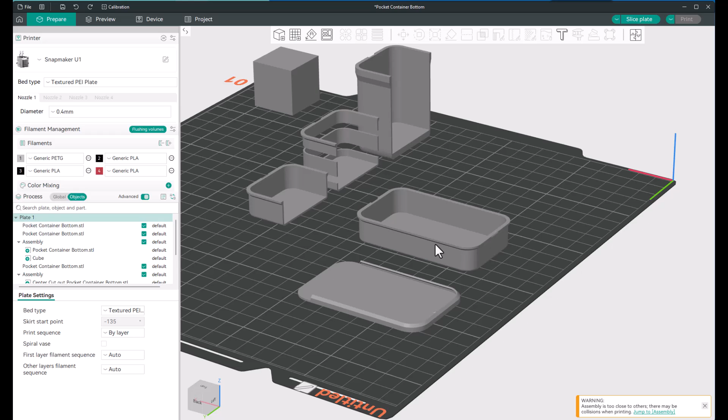Let me grab a lid. Right there, this is what the lid looks like. Let's flip it over. So what happens is the lid has these rails on it. There's no rail on this side of the lid, it's just flat. The rail wraps all the way around. This lip on top of the bottom is what holds it on, and it's got two indentations right here. Then the lid actually has a little nub that holds it in these places. It works really good, it's a good little design.

Let me show you where I got it from. So here's where I got it from, Maker World, and it looks like the designer's name is Arc 3D Printing. He's got... I don't see any pictures here, but I thought on the other one he had pictures, yeah right here. So this is the same thing, but he shows you how to put text on it. I went through and made a video on how to put text on pretty much any 3D model. He's got SD and USB drives, SD cards, magnets, all kinds of stuff. Anyway, that's where I got it, to give him credit for the design. It's a good little design if you want to print some, download it and print some.

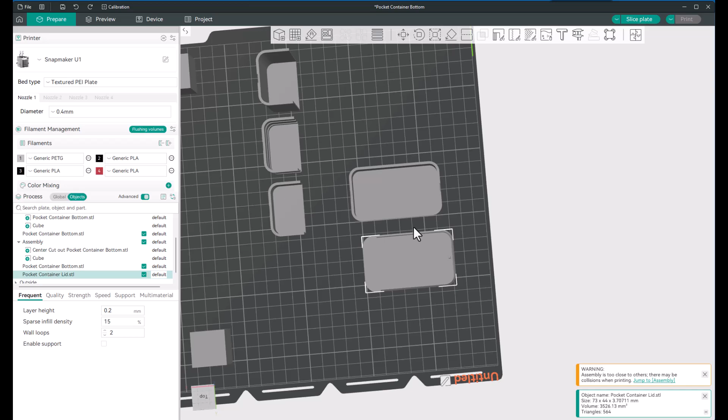So like I said, we have the bottom of the container right here, and we have the lid right here. So the problem is, if we were just to go, say we want to resize this, say we want this thing like 30 or 40 millimeters tall, and we go here...

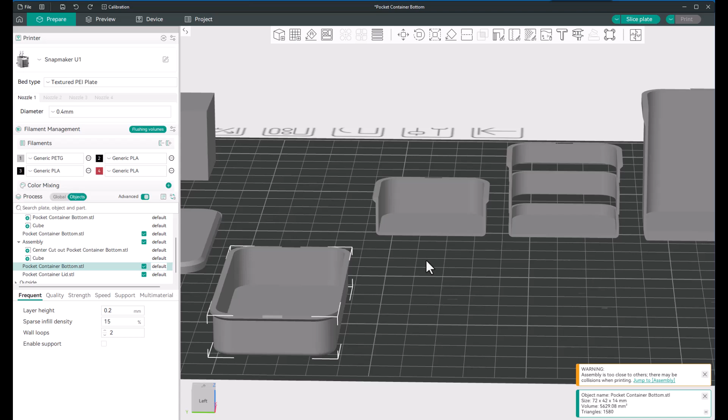These are cutouts that I made just to show everybody what happens when we start scaling these. That's why a lot of times it's not really a good idea to scale things. So here's a cutout of the original. Let me move this guy over right here.

Oh man, I want to make this video fast too.

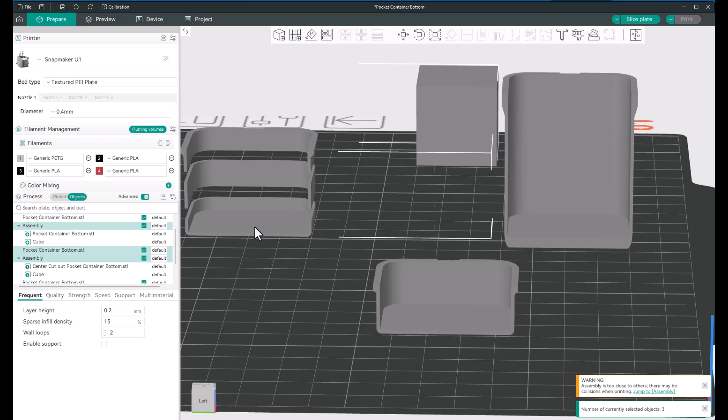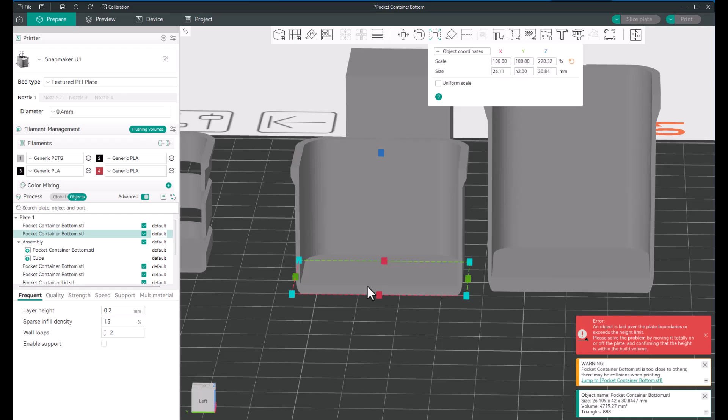All right, so here's a cutout of what it should look like, and then this is what happened to it when I scaled it. You can see when I scaled it, and what I mean by scaling it is I just select the part, go up here, click on scale, and I wanted to scale it higher for the Z, so then I would just start scaling it like this. Well, at the same time I'm scaling this, the groove around the whole part is getting bigger, and the bottom is actually getting bigger toward the floor of the container. So that's not going to work for 3D printing, because you'd be wasting extra hours just printing this thing.

I'm going to hit undo so it goes back down to where it should be. This is just an example of how extruded it got when I did that to it. Okay, so we can't scale these. Some things you can scale and it's no big deal, you don't really care.

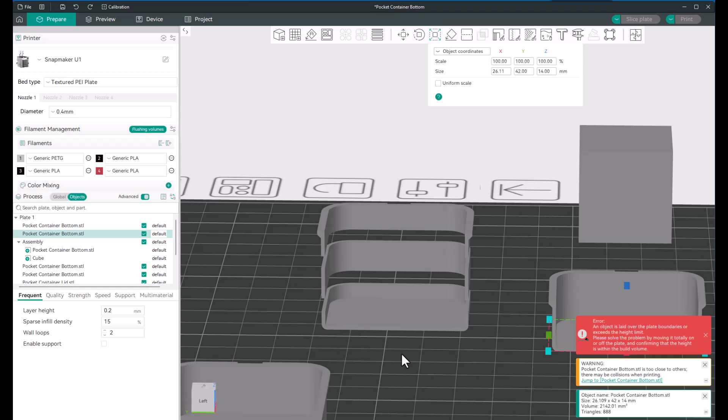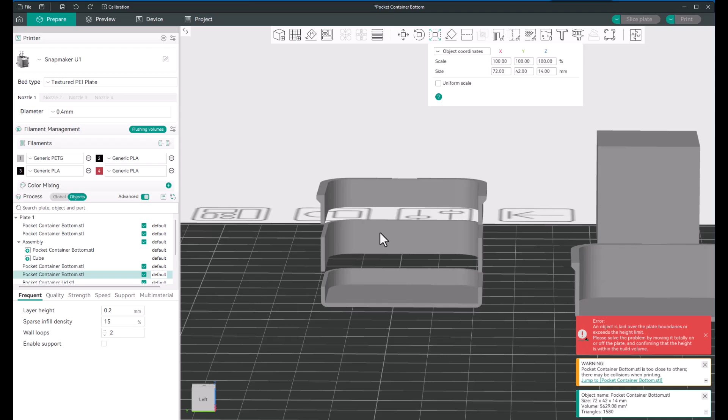So the only way to really be able to do this is to cut it up into three. Let me get this out of the way here, and cut it into three separate pieces. So we have the bottom, we have a center section. We don't want to scale the bottom because the floor got thicker down here, and we don't want to scale the top because this lip around it got bigger. So the only thing we can really scale to make it bigger is this center section that I cut out here.

So if we go and click on this center section, over here in my objects, I actually named the center section right here so I can get to it easier. But so we have the top section, let me grab the top. Let's see, so it must be this one, right? Gosh dang it, which one is the top?

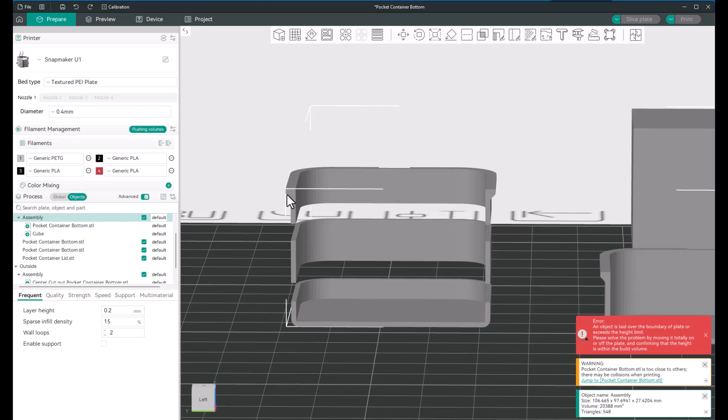Well, what assembly would be? That's the center one, that's the lid. This is another section because it's not highlighting that one. Okay, there's the top right there.

To change the name in the object menu, I can just hold my left mouse button and it'll finally let you do that. Let me put top... top section. Okay, so that's our top section right there.

And what we'd want to do is we're only going to be able to scale this center section. See how there's nothing that's going to change when we scale it? So all I would do is click on that center section.

I would go up here to scale, and then however tall I wanted it, I've already moved my top to that height. And then really what you have to do is go to your move tool.

And now I'm in the move tool. I still have the center highlighted, and I'm going to bring that down until it touches this bottom part here. So when I bring that down, that's good right there, okay?

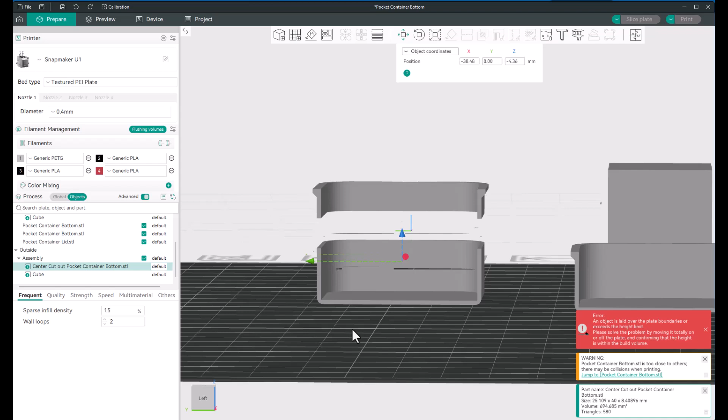Then I'm going to go ahead and go to scale, because now I need to scale this part. And if I hold control and then my blue, this is my Z, and I can pull up from the top only.

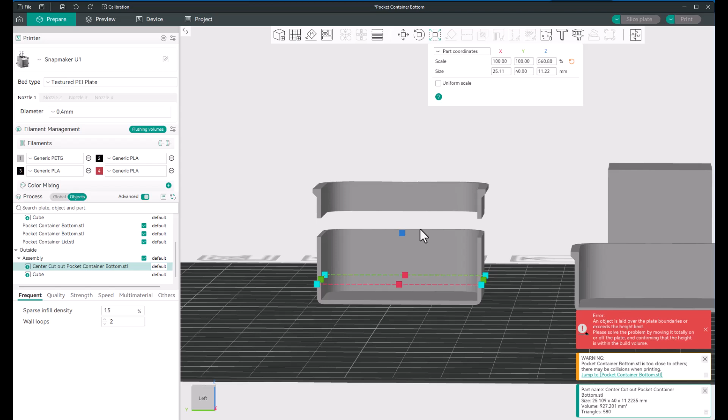If I don't hold control, it's going to scale the whole part on the bottom, which isn't really going to hurt anything in this situation, but that way you can just scale it differently. So I'm holding control and I'm only moving the top, okay?

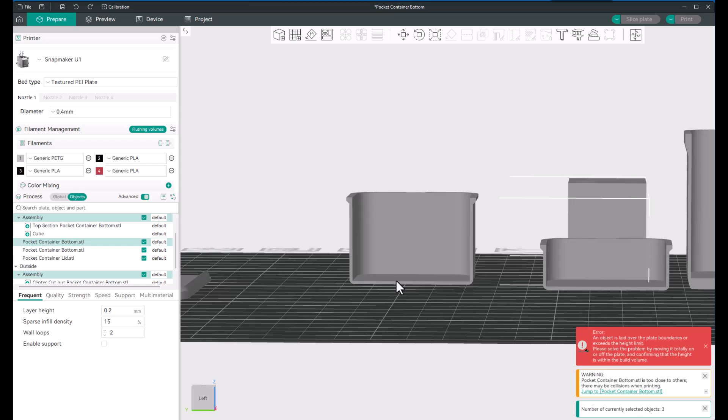So now what I would do with this part, if I was done with it, I would hold my left mouse button and shift, select it, right click, and click on assemble. Now I'm not worried about doing that right now because I'm going to show you how I got to this place right here.

Okay, so here's the bottom of a container. I'm going to take this lid and move it over here out of the way. So here's a bottom container. And let's see what orientation we're looking at. Okay, I'm going to move it back a little bit. So we're looking front to back at this container right here.

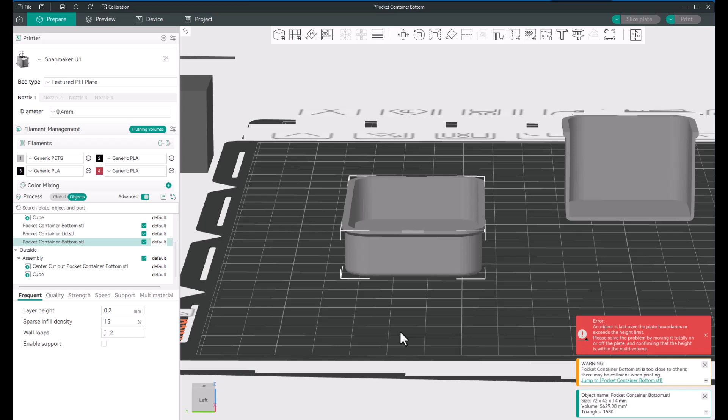So what I want to do is cut this into 3 sections, just like I did in that example. So what I like to do is click on left so everything's looking pretty straight. Then I'm going to go cut it. Now see where the pink is going to be one part and the green is going to be another part.

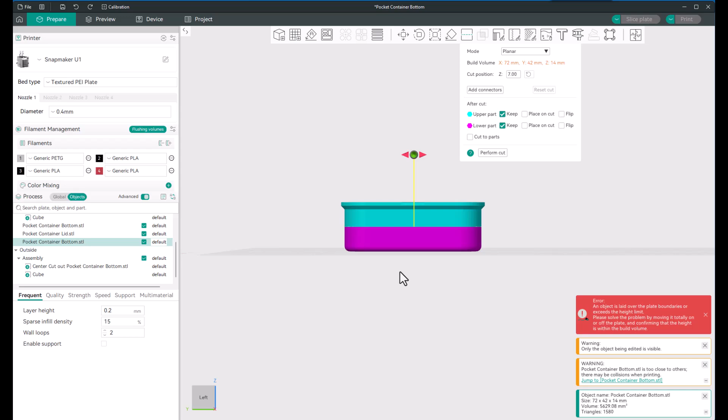Now, if you ever want to change this axis of how you're going to be cutting this, let me go left side. So okay, this would be cutting right now. It's going to cut the green as one part and then the pink as the other part. Now say I wanted to cut the other direction.

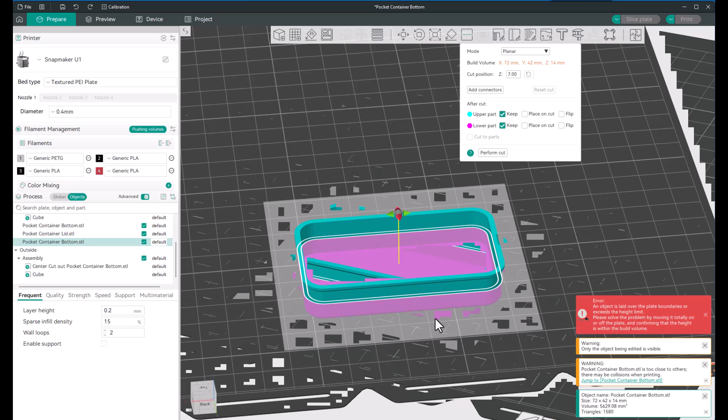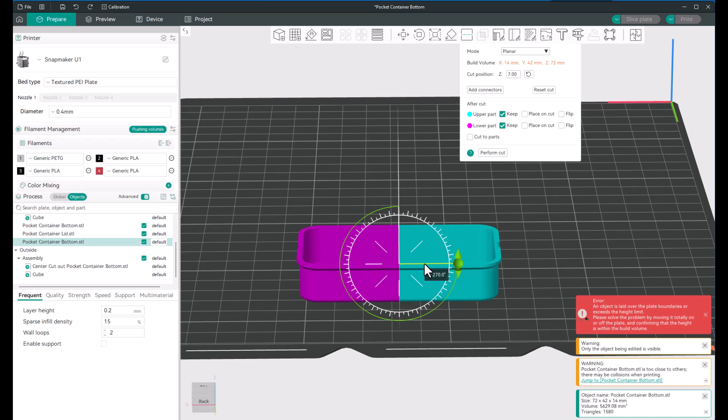So you can see the 2 halves right here. Say I wanted to cut in this direction right here. I could pull this all the way around, hold it to the center mark here, and if you're moving this around, holding it on that center mark, it stops every 45 degrees, and the outside one would stop every 5 degrees.

So now I could cut it this way vertically. Now I don't want to do that, I want to cut it the other direction. So I'm just going to put this back the way we had it. And if I move my mouse down, I can center here.

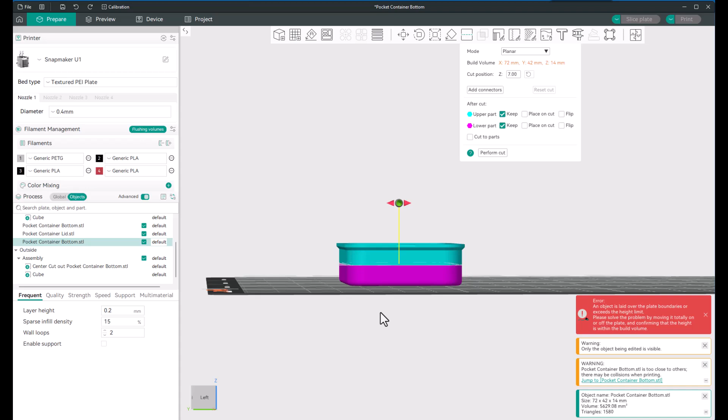Okay, so now I'm just going to go around to the front here, and say, okay, well if I want to move this, this is going to be the Z cut. I can hover over here, let me come down a little bit. When this turns yellow like a tennis ball, then you can pull on that.

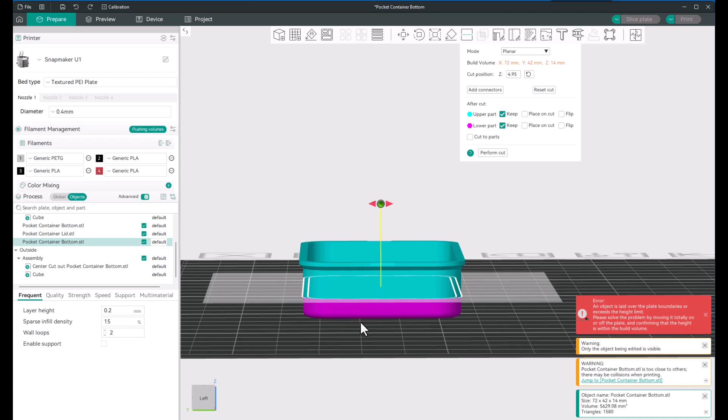So I'm going to pull that down because I want to make a different cut there. Okay, now I'm not getting into the curve, everything is still straight here. So I'm good with that. I'm going to go ahead and cut that right there.

So now I'm going to have two parts there. And what it's going to do is drop to the bed, because there's nothing telling it to hold that up right there. That's what slicer programs do, they drop everything to the build plate. Now I got two parts right here on top of each other, and I really can't tell which one is which. Now they're highlighted over here, so I can see which one is which.

I'm going to click on this right here. Now, the part with the lip on it, I have the bottom piece selected right here, and that's going to stay. This piece right here is the one with the lip on it, and I want to be able to move that up in the air.

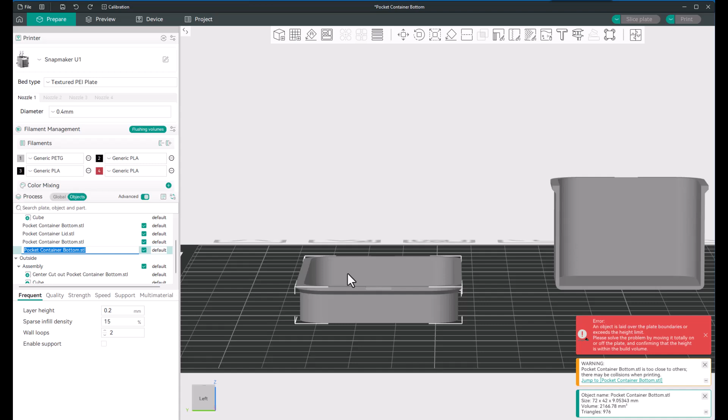So what I'm going to do is click on the build plate over here. This computer is running kind of slow, but I'm going to right click on an empty space, go add primitive, and add a cube. That cube is going to come out in the center of the build plate. Let me zoom out, come on computer. All right, so here's this cube that I just made, a primitive cube, okay?

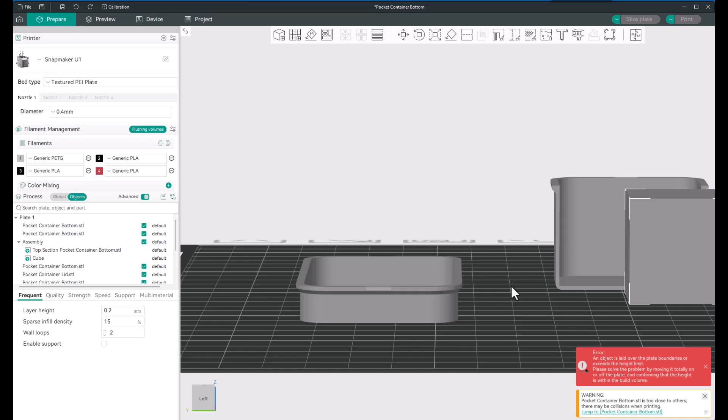I'm going to put it back here for now, and the reason is I need that cube to help me elevate this part that I have right here, okay?

So let's see if I can choose the right part. Okay, so that's the part I want, because I can tell this white is engulfing the part up here. If I were to click on that part, that's the bottom part that I just separated. So I'm going to click on this part right here, the top part, and then hold control and click on that cube back there. Now I have the cube and the top part highlighted, and I'm going to right click and assemble those. Okay, now the program thinks this cube is staying on the build plate.

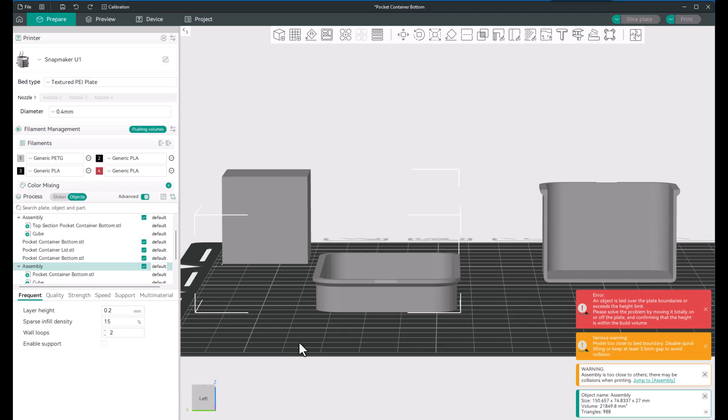So now I can go over and highlight this part right here. Let's see, I'm going to go to move. Let's see if it moves yet. Nope, it's moving the cube too. All right, so I'm going to hit undo. Got that back on the build plate.

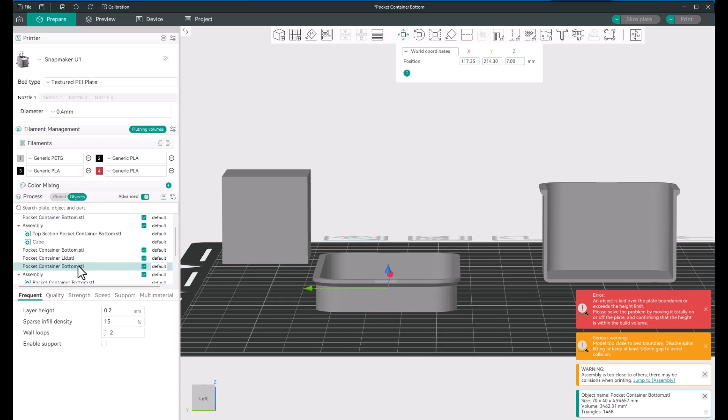I'm going to try to figure out which part it is, and I should have marked this, but I didn't. So I think this is it right here. And that's not it, that's the bottom one. See how the bottom one snapped back down to the build plate? That's because I don't have it assembled with another part on the build plate. So let's see if that's it right there. I think that is it right here. Okay, so there's the top.

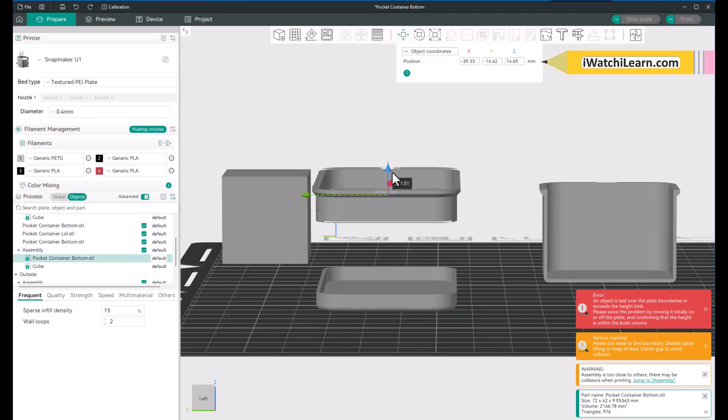This cube is allowing me to move this up. All I did is go to the move tool. Now what I would do is just move this to the height that I want it, and I don't really know what that is. This is not right up here. It's not really telling me that it's 14.69 millimeters.

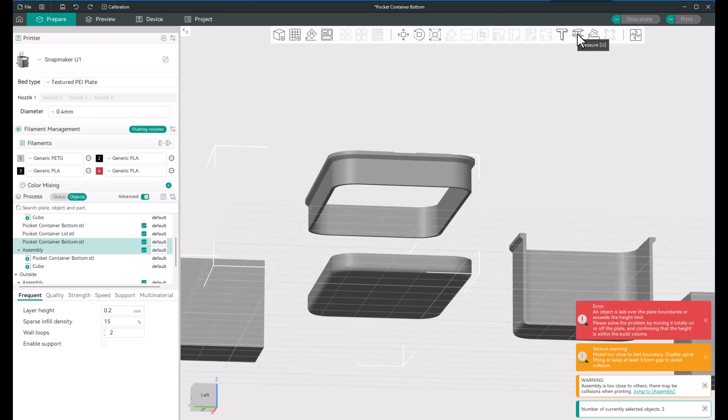But if I really wanted to check, I could go here to the measure tool. Now one thing you have to do is have the parts highlighted to measure them. So I'd have to hold control in, and now I should have both those parts highlighted. I could put my first measurement right there on this green - it tells you up here the green - and then select another plane. My other plane I'm going to select is the top of this. Okay, so that tells me right now that's at 33.410 millimeters. Now I think you can pull this?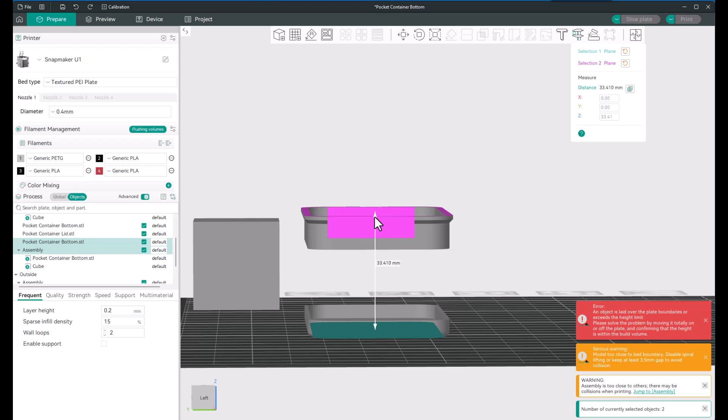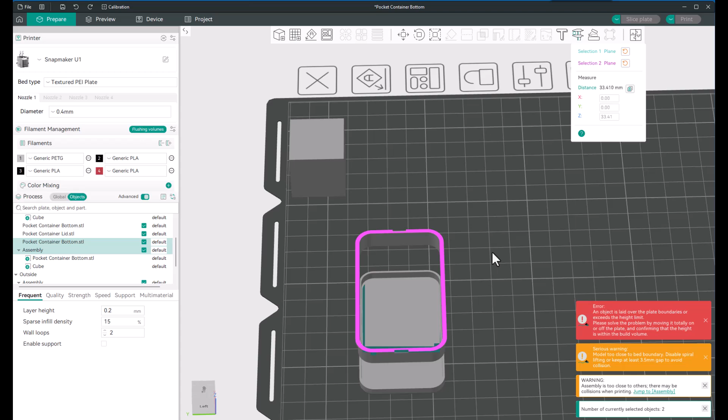No, I guess not, huh. I thought you could pull that there. Yeah, it's still wanting to measure, but all that does is tell you the measurement difference. So if I did want to reset that, I could just go here, hit clear on the right side and reset it here. And so that's 33.410. Now if that's the actual height I wanted, then I'd be good to go. If that's not the actual height I wanted, then I would just get out of my measurement tool.

I would highlight that section, which would be that assembly. When you click on it, the assembly over here on the left side is going to highlight it over here. So this is the assembly that I'm working with. In that assembly, I have that top part and that cube.

If I click on this, it's going to highlight that top part, and then I could hit move, and I could remember what the measurement was, and then just move it the amount I wanted. Say you were going up to 40 millimeters. Now this isn't going to tell you the right measurement here. So say I say, okay, that's good, I'll take that right there where it is.

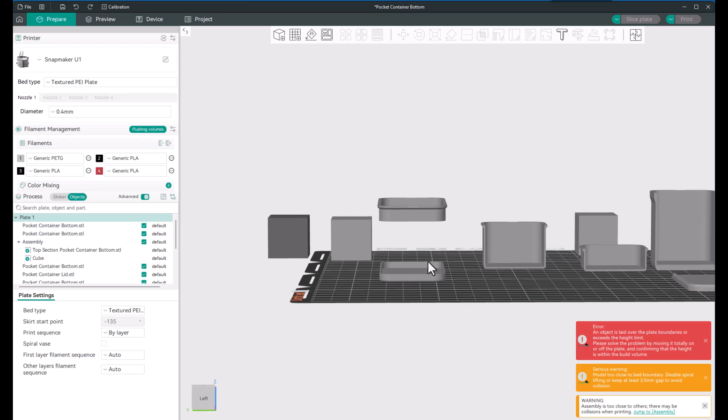So now to actually size this again, I really do need to take another cut out of this, because it's not going to let me size it right if I wanted to. So I'm going to go grab, let's see here. I'm going to select this so I know what assembly it is. So it's going to be that top piece right here. That's the piece I want to cut.

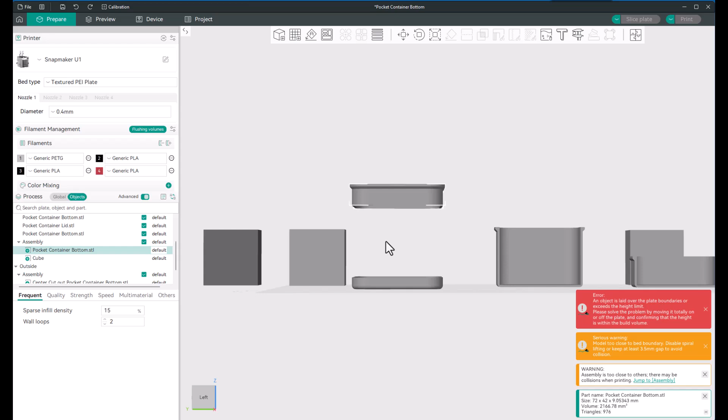And it's not going to let me cut it because I have this other—well, how do I explain that—I have the cube. It's not going to let me cut an assembly. I just have to cut one object at a time. So I'm going to go down here. See how the pocket container bottom that I have selected? It's not an assembly, it's on its own.

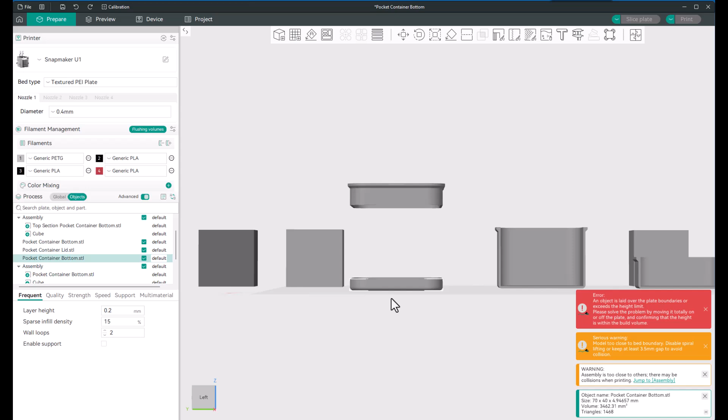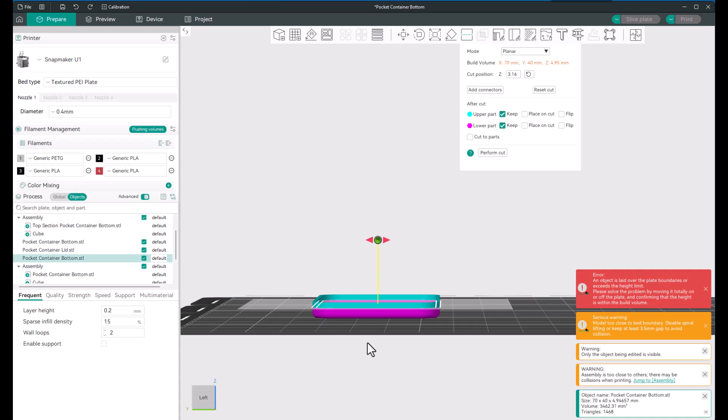So I'm going to go ahead and cut that, because I can cut quite a bit of it here before it gets into the bottom, which is fine. So I'm just going to go here and cut that. And I need to get that tennis ball to turn yellow right there. Then I can move it, and it's kind of hard for you to see, but right now that's my cut I'm making. The green and the pink is what's actually going to be cutting.

Okay, so yeah, I'm good there. I'm not cutting into the floor. Kind of looked like it for a bit, I was cutting into the floor there, but I think it's just the way the colors turn up when you're tilting it. So I'm going to go ahead and do my cut. Now I've got two pieces laying on themselves.

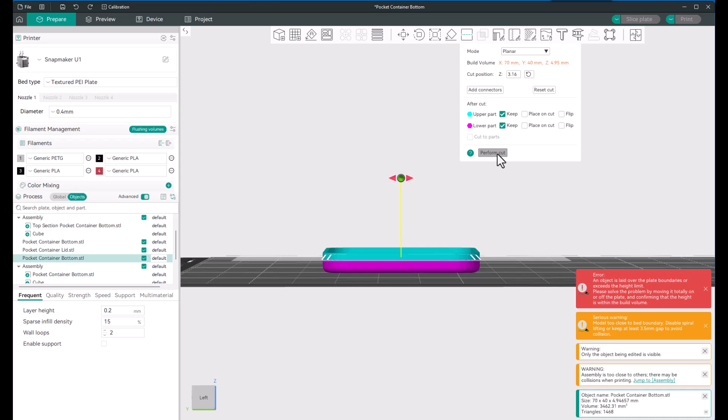So now I need to go over here and figure out—it's telling me you got A and B. So there's my A one right there. See how it's so much skinnier than the B? The B is the full height one. So here's what I need to do again: I need to right click anywhere on the bed, go add primitive, and add another cube.

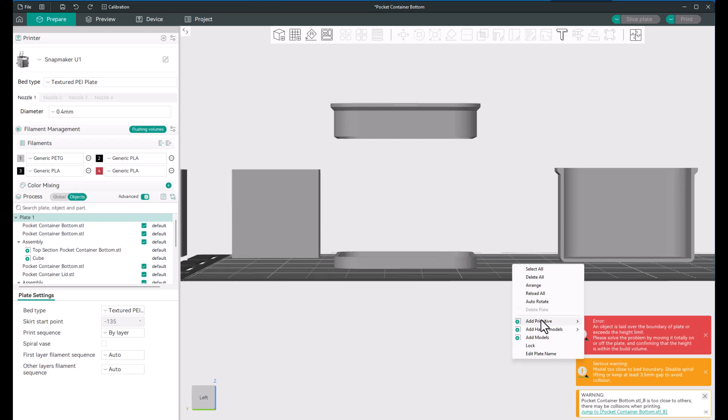I'm going to grab that cube. Computer is—what are we doing, computer? Okay, so this is the new cube that I just now created.

So, and you can size these however you want to. You can make them as small as you want, it just has to be a part. It doesn't matter how big it is or anything. But I'm just going to set it over here for now.

Okay, so what I'm going to do is grab that short section of this right here, and you'll see what I'm talking about. Then I want to go here, hold Control, and either click on my cube here or click on my cube over here. I'm just going to do it right there because it's easier for me to see. See how the cube is highlighted now, and this part is highlighted.

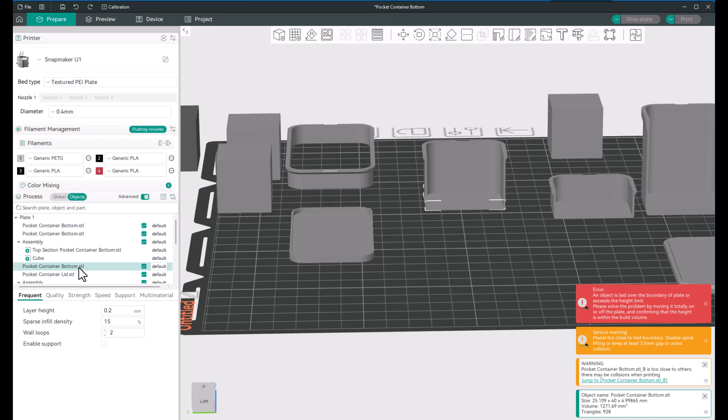Now what I want to do is right click and hit Assemble. Now when I go over here and click on this part—let me get on that part right there. So it would be this part right here. Let's see—nope, it's not that part.

It's not that part. Sometimes you do need to take the time and label these—it does make them easier to figure out what's what. Okay, there it is—see the lower one of those two parts.

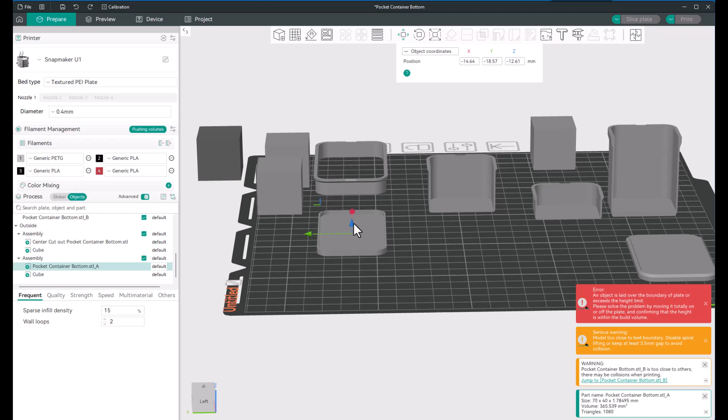So now if I click on move, now I can move that cutout up. And I'm going to hit Control Z, and I'm going to try to hold that straight because you can get off, and I don't want to get off.

Okay, now that's—that's actually the wrong part that I'm trying to move here too. Okay, let's see something here. Either that or I forgot to—no, I made it an assembly. Okay, so there's the cube. Did I assemble the wrong one? No, that's it right there. Okay, I just grabbed the wrong one—I just had the wrong one selected.

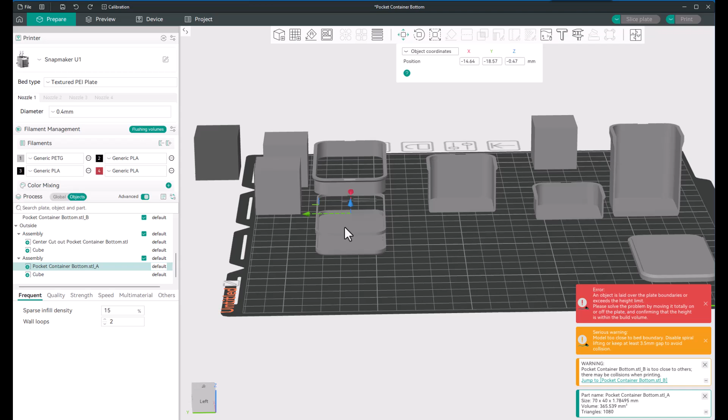Okay, so now I have this thin layer here, and that's the part that I'm actually going to scale, because it's not going to affect the bottom, and it's not going to affect the top with this lip in it here.

Okay, so now what I want to do is take my scale tool. I'm just going to go over here and click on scale, and then as I raise the Z right here, I'm going to hold it with my left mouse button. As I raise that, it's also going down, so I'm going to get quite a ways, because it's not going to connect on the top and the bottom at the same time.

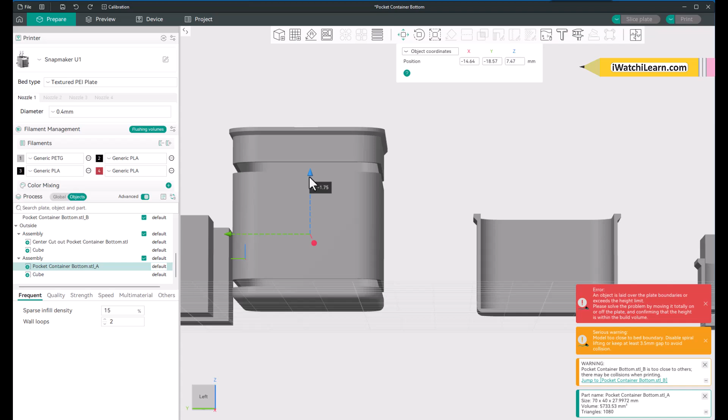So then what I'm going to do is go to move, and I'm going to bring that down, bringing it down into that other part. And when I bring that down into the other part, right there, now I can go back to scale, click on scale up here.

And now I'm going to hold control in and grab this Z blue square here, because I don't want it scaling on the bottom. I don't want it going down past the build plate. So I'm going to hold control in, and then I'm going to move that up right there.

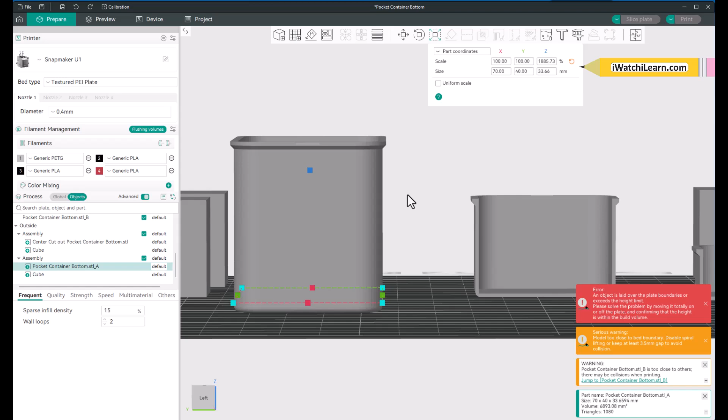At that point, what I could do is reassemble these, or I think it would actually just be fine right now. So depending on what I want to do, let's see something here. If I hold shift in, put a line around them, let's see if it'll let me assemble it. It will let me assemble it, so I'm going to do that.

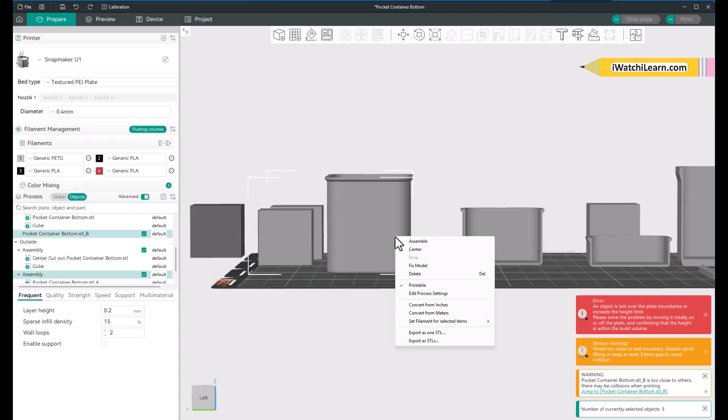And then what I'm also going to do is start getting rid of all these squares, because now I'm really done with them. I don't need them anymore. So when I try to select these squares like this, it doesn't want to let me select them, because they are in assemblies.

Okay, so there's different ways of doing it. What I'm going to do is try to select it over here, and it'll let me select it over here in the object, where it won't let me select it over here, which is kind of weird, but that's okay. So I'm just going to select that cube, and I'm going to hit delete.

Then I'm going to select that cube and hit delete. And all these other cubes, I don't really need anymore. But on these ones over here, I kind of do still need them, because they might be holding those parts up still. That's what they are used for.

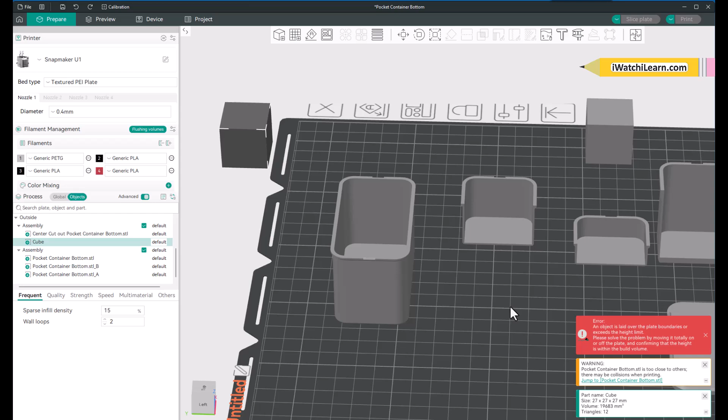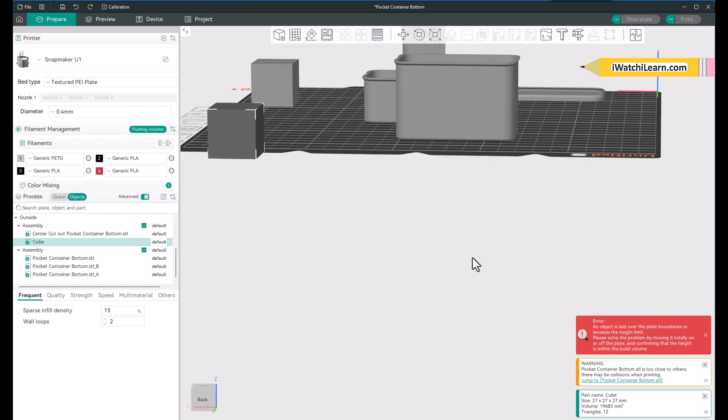But in this situation right here, we have this part ready to go, and we've changed that. We've made it taller by cutting it into 3 sections. And then we could do the same thing on this side if we needed to, or the front side. Either way, we could cut it vertically here, then 3 sections, cut it out, and make it wider, exactly like we just did on the vertical side.

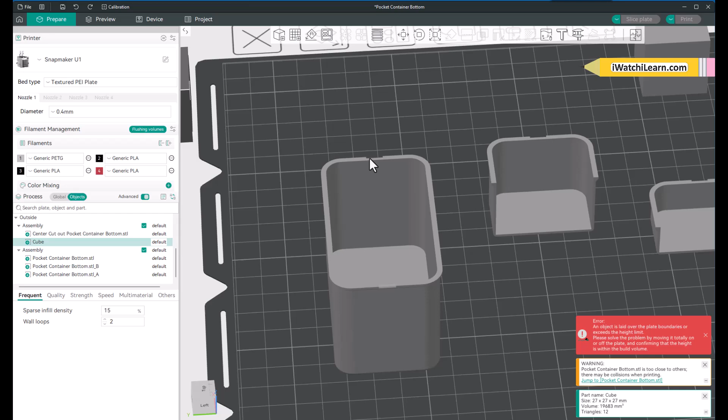But what we would want to do is not cut it right in the center here, because it has these little nibs for the top to lock into. So in that instance, if I was wanting to cut this to make it wider, we already made it taller, and it's a good part. It's ready to go print.

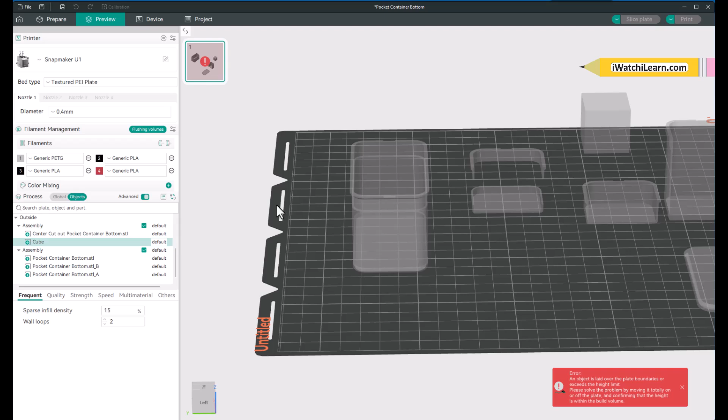Like if we clicked on print here, let's see how long it's going to take. I might have to pause it. And it does say I have some errors, because I know I got errors, I got parts sitting all over that don't want to be next to each other and stuff like that.

Okay, so it's not able to actually, I got too much stuff off, and I got a cube over here that's not even on the plate. So let's, and it is highlighted, so let's go ahead and delete that. Let's see what that does when we delete it.

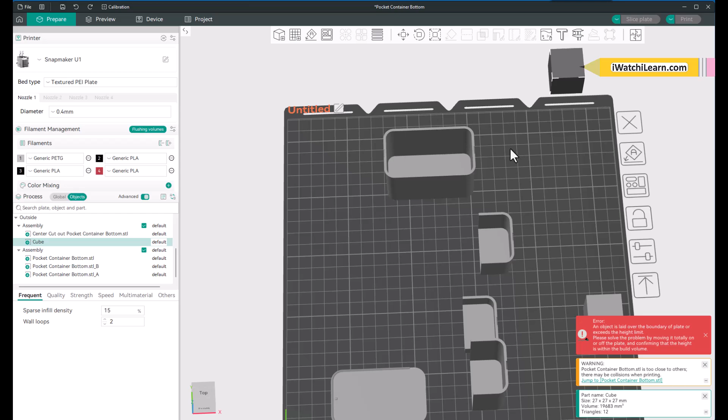This is still up in the air, so must be this cube that is used for that though. But if we get back here to this one right here and say we want to make this one wider, we already made it taller. Now we want to make it wider.

So what we can do is, I want to be looking straight at it. It doesn't really matter, but I'm going to come down because I want to be able to see these cutouts right here. So I'm going to select this.

And when I select it, then I can go over here and grab the cut tool. Now it wants to cut horizontally, and we don't want to cut horizontally. We want to cut this vertically.

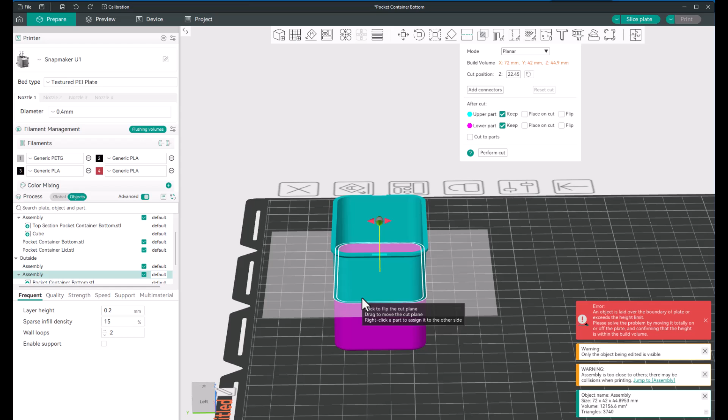So I'm just going to grab this right here. I'm going to put my mouse on the inside so it locks on that 90 degree there. If I was on the outside, I could lock on any of these 5 degree out here. If I'm out here, I wouldn't lock on anything, but if my mouse is over those, it'll lock. Same way here, it'll lock there when I'm inside now, and it'll lock there.

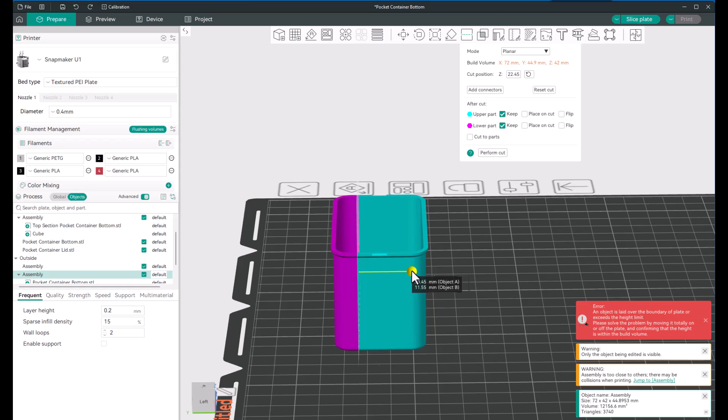Okay, so now we've got the pink and the green. This is where it's going to cut, but that's not where I want to cut it, because I don't want to cut it where that indentation is there, since I don't want any more work. So I'm going to hover here and get the tennis ball, and move that plane over right there, because I don't want to get in this curve. I can just do a straight cut through there.

And the beauty of cutting vertically like this is we don't have to use those cubes anymore, because the parts are sitting on the build plate. Okay, so we'll go ahead and hit perform cut.

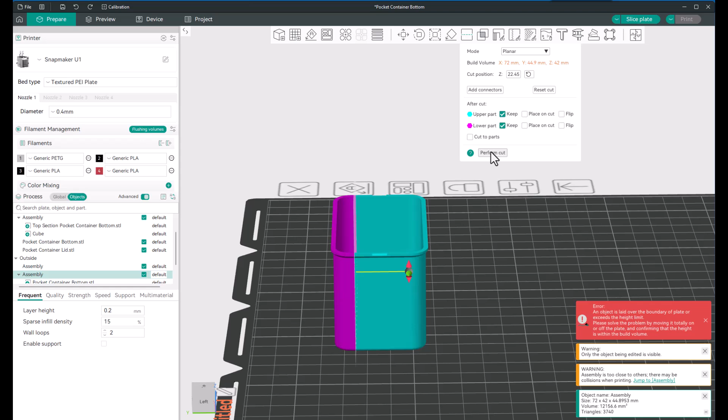So now if we were to select, I'm going to deselect it and select this. I've got this part right here, and I've got this part right here.

So it looks like those are actually in 3 parts, which they could be, because I don't know if I ever assembled the other ones back, or it doesn't really matter. But if you click on those, it'll tell us that's one part, that's another part, that's the center of that part.

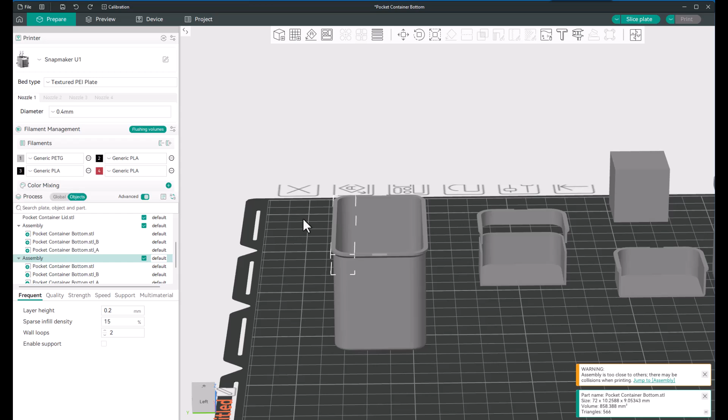Then if I click on these over here, see where I'm looking and saying these are parts? So this is a part right here. I could actually just grab this and move it. See how it grabbed and moved? But I don't want to do that, because I'm still cutting this vertically.

Okay, so I can go ahead and I want to highlight this again, because I want to cut this again. Now I'm going to go ahead and move that out of the way. So I hit my move tool, and I'm just going to move this out of the way, because I really want to make this wider.

And at this point I would be trying to figure out how wide I want to make it. But now there's some things I could do here to cut it. I really need to cut this. I don't want to cut it over here anymore, because it's got this curve. I don't really want to cut on this side of the indentation, because I don't want, for some reason, this part growing or changing right here.

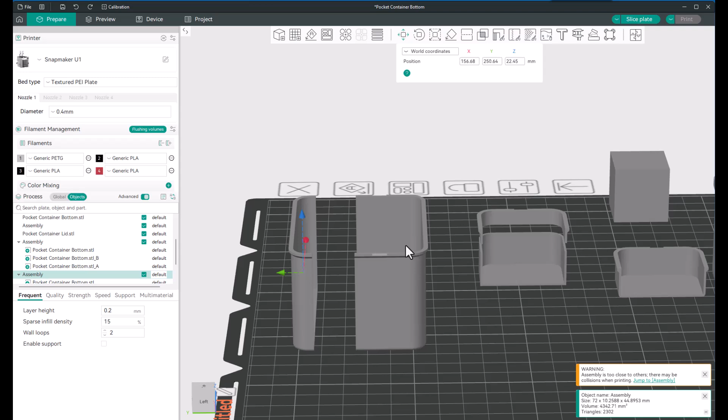Okay, so what I would rather do is make one more cut, vertically right here on this side of that deal. So I'm going to go ahead and highlight this part. Well, I'm going to have to get out of the move tool first. Now I've got this highlighted.

I just clicked on the part. You can see these white reference marks. I'm going to hit my cut tool again. Okay, so it automatically comes up as a horizontal cut. You can see the plane right here.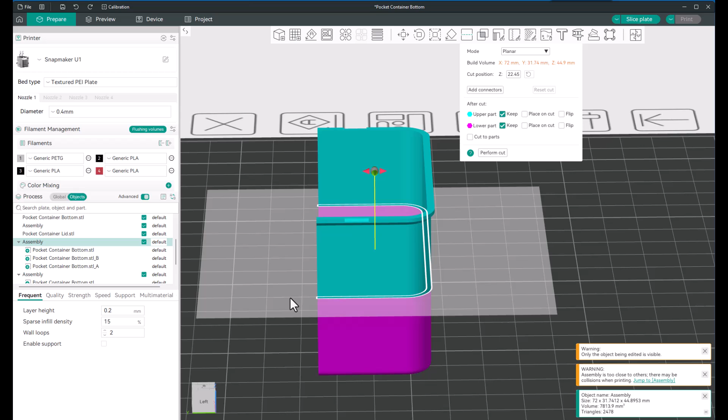So I don't want that. I want to turn this vertical. So I'm going to turn that plane vertical. Kind of reminds me of your work planes in Fusion 360. So there we go. I'm going to cut right there, but I don't want to cut right there, because I want to cut right here on the left side of that indentation.

So I hover over this right here, get my tennis ball. Then I'm able to move that cut to where I want it. Right there is where I want it. See, one side's going to be my pink side, one side's going to be my green side. And you probably want to have these checked where it says keep, because that means you're going to keep the part.

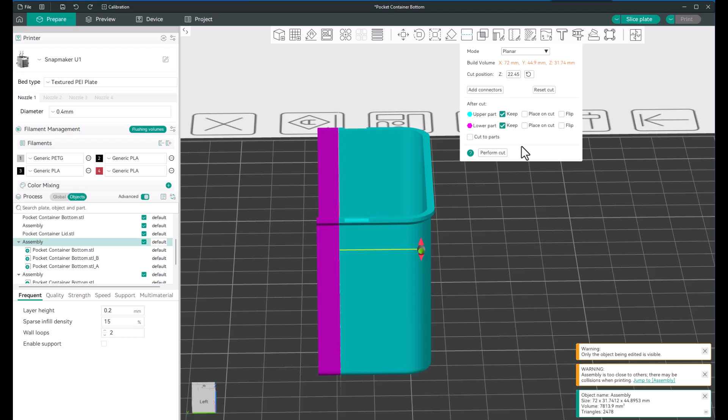Okay, so now, even though this looks like one part right here, this is actually 2 parts. So I deselected it, reselected it, and this is the part that I just made. So I'm going to grab the move tool and move that over.

Okay, so now this is the part. I'm going to hit escape twice to get out of the move tool.

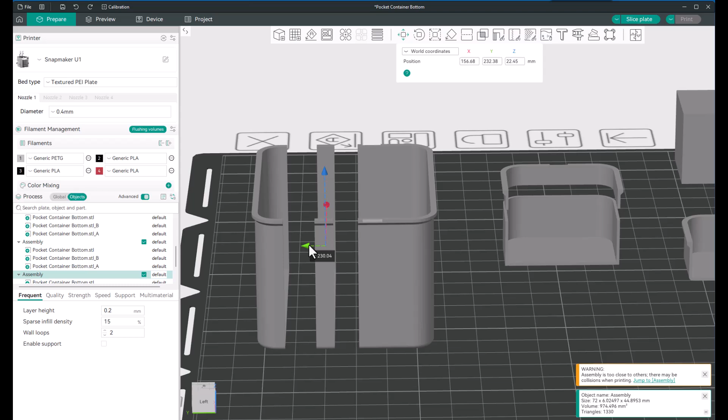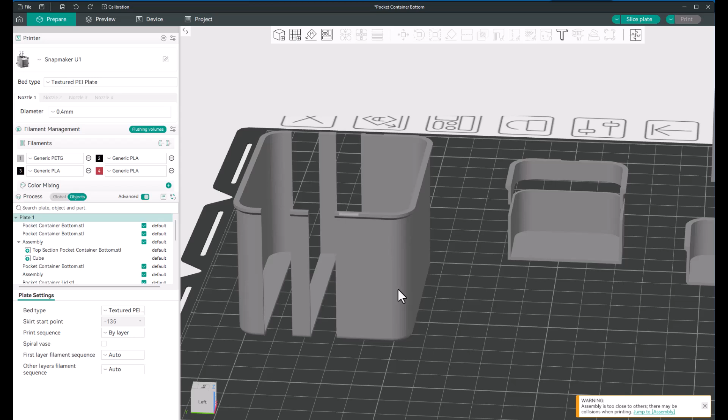And so now you can see I got my parts, and what I want to do is stretch this center part with the scale tool. To begin with, I'm gonna grab this part right here and select that, then go up here to scale and just hover around here to look at some stuff.

So what I want to do is work with those green ones inside of here. This is either my X or Y in here, so I can go ahead and move these. Now see how that's stretching there?

I'm going to go ahead and keep going and see which one I run into first. I ran into the right side first, so I'm going to close that gap here on the right side. Then if I hold Control in, now I can just move the one side here. I'm not moving the right side anymore because I'm holding Control in.

I'm left mouse clicking on that green one there, and then I'm just going to go right into the edge barely. I just want it to go in there enough to close the gap. Okay, so now I've done that, and now I'm going to assemble all this again, just because now I've made my total part. I'm going to right click on it and hit assemble.

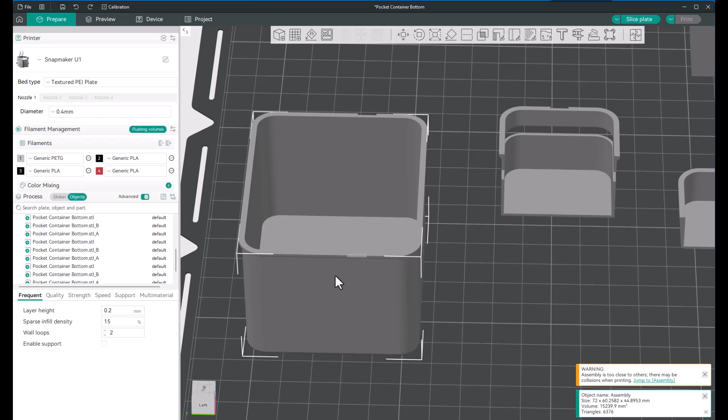Okay, so let's go ahead. Oh, I didn't know you could scroll like that. That's pretty cool. So you can scroll in and out over here if you just click anywhere on the build plate.

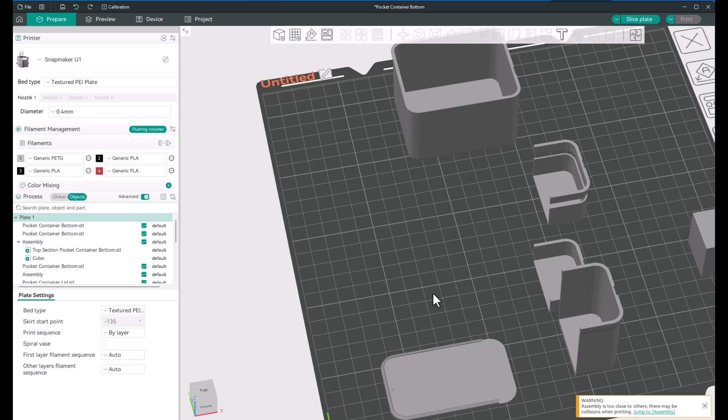So there we go. We took this part right here, and what's kind of neat about it is we can go over here and say, okay, I'm going to select the part and cut it. I don't want to cut it. I'm gonna hold my right mouse button and drag on the deal to get it out of the way of that pop up there.

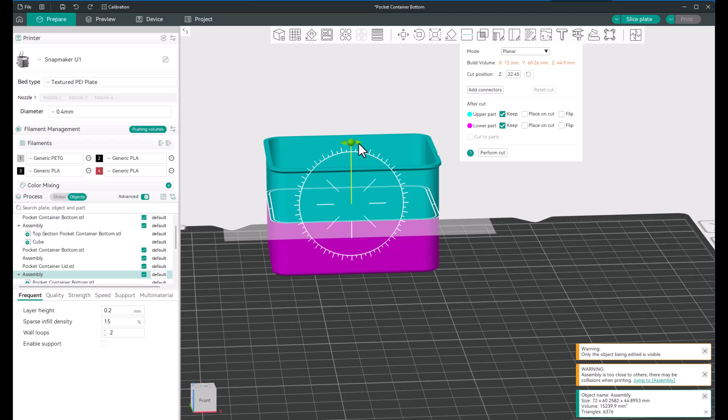So I want to cut this, but I don't want to cut it horizontally. I want to cut it vertically, and all I'm going to do is what would be like an inspection in Fusion 360. So I'm just going to cut that right there.

Okay. As I... I have no idea what that music is starting for. Nice music though.

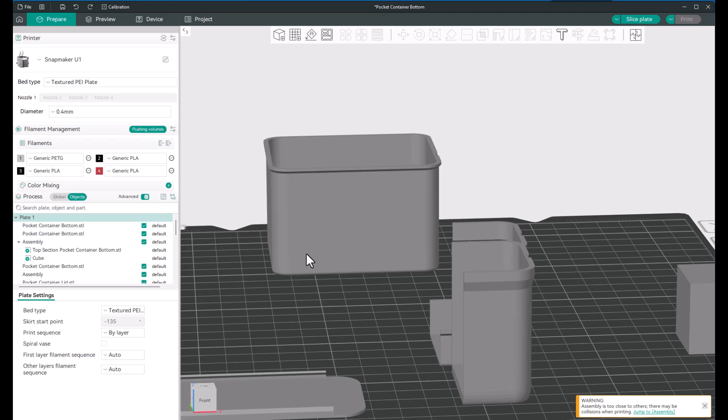All right, so what I'm going to do then is go ahead, and since I just made my cut, I'm going to highlight this side over here and just delete that. Okay, and I just want to go here and orbit, drag this over, and I just want to show you that we've made this part here.

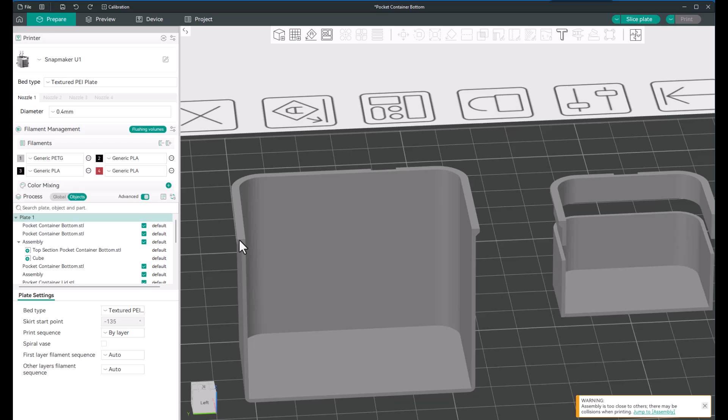And it's perfect. We didn't increase the bottom, we didn't increase these ridges here, but I do see a problem, and it's just something else you would have to figure out when you're doing this, or you can just move it over. But you see how we lost this here? See how my little indentation moved? So I'd want to figure out where to make those cuts so that doesn't move.

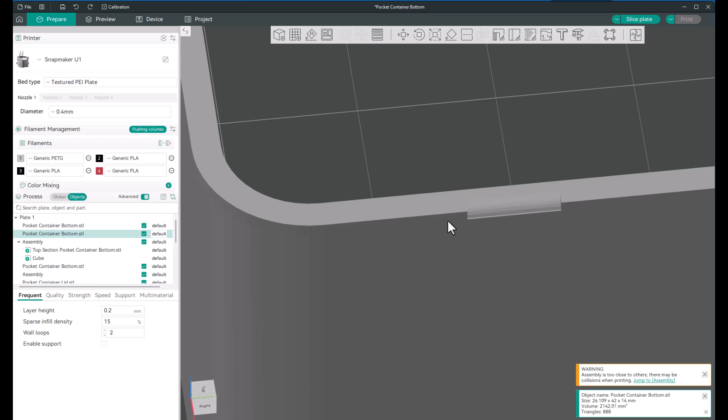Or maybe I'd even want to cut that in the middle. I don't know for sure. But that's just an easy way, or not easy way, but that is a way that you can perfectly cut any of these 3D STLs or meshes, any of these files.

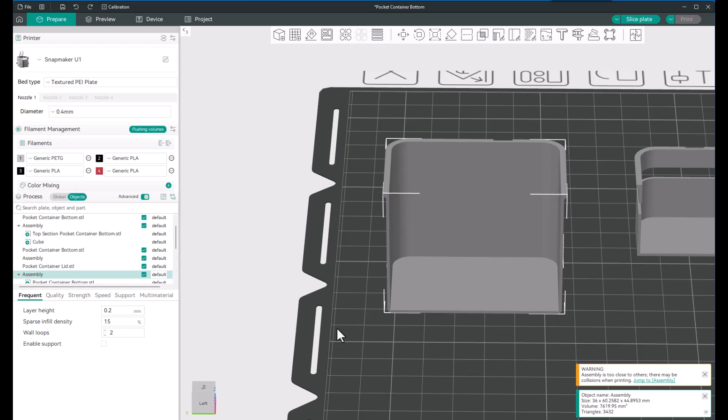You can make them out of whatever you want, and you can take what I've just given you, and I do have another video also. You can take that information and fix or do whatever you want to any part. You're not stuck with any part that, like the other day, I wanted to make a sponge holder for my sink, and they had it real wide and I wanted it real narrow, and I was able to take that same part without doing any CAD work and make that design.